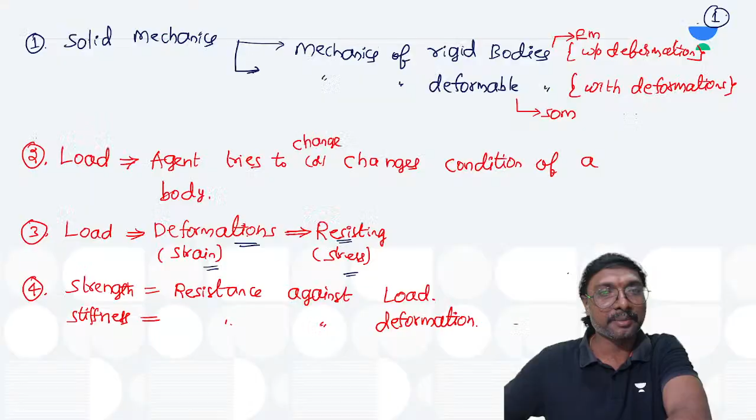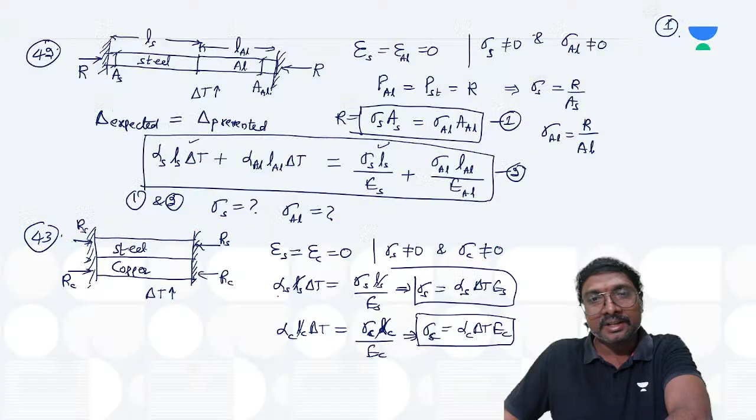So here if you just look at it, 6 lectures we have done. Thermal stresses, stresses on the oblique plane we have done, right? Strain energy also we have done, isn't it? Stresses on the oblique plane we have seen, right? So that sigma theta and tau theta expressions, right? 55 points get over now. So this is your lecture 7 quick revision, principal stresses and strains, right? Now we'll be going for the 56th one.

First of all, what is the principal plane? Tell me. What is the principal plane if you just observe? The principal plane is nothing but a plane with what conditions? Tell me. So on an inclined plane you may be having normal stresses as well as shear stresses, no? So it is a plane with only normal stresses.

Plane with what conditions? Tell me. Only with normal stresses, without any shear stresses, right? Only normal stresses, without any shear stresses. That is your principal plane, right? And the normal stresses on the principal plane are called which one? Tell me. Principal stresses only, no? The normal stresses.

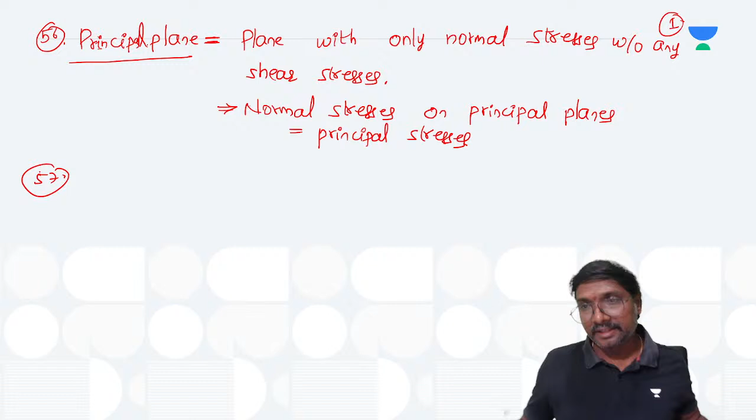The normal stresses present on the principal planes are called as what? The normal stresses on the principal planes are called as which one you can say? Principal stresses. Okay, that is what you are having. Now, if you are writing the expression for these principal stresses, what is the expression for this principal stress you can say?

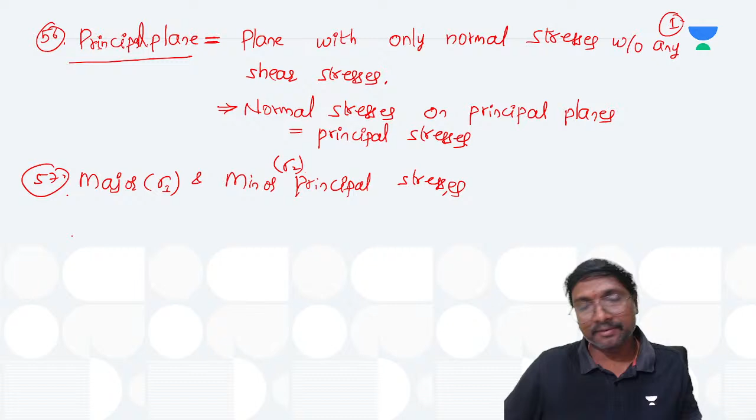That is your sigma 1,2. So how can you get this? Sigma x plus sigma y by 2, plus or minus, under a root. I am not going for the derivation, just the expressions are important for us. Sigma x plus sigma y by 2 plus or minus root of sigma x minus sigma y by 2 whole square plus tau xy square. This is for the plane stress condition.

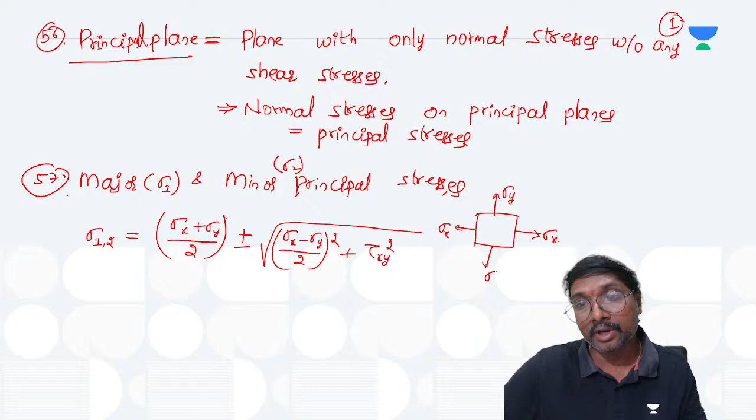So what is the plane stress condition? You will be having the two normal stresses sigma x and sigma y. Along with that, you will have two sets of shear stresses, tau xy and tau yx. Tau xy is equal to tau yx, right? Now whenever you take plus, you will get sigma 1, the major principal stress. If you substitute minus, you will get the minor principal stress sigma 2.

Now, what is the position of the principal planes? Tell me. Position of the principal planes: tan 2 theta, or 2 alpha you can take it, is tau xy divided by sigma x minus sigma y by 2. So alpha 1 you will be getting from here. And what is alpha 2? Alpha 1 plus 90.

If you are getting one alpha, what is alpha 2? Both the principal planes will be perpendicular to each other, you can understand from this expression. Is it clear? No? So shall I go for the next? Everyone noted this or not?

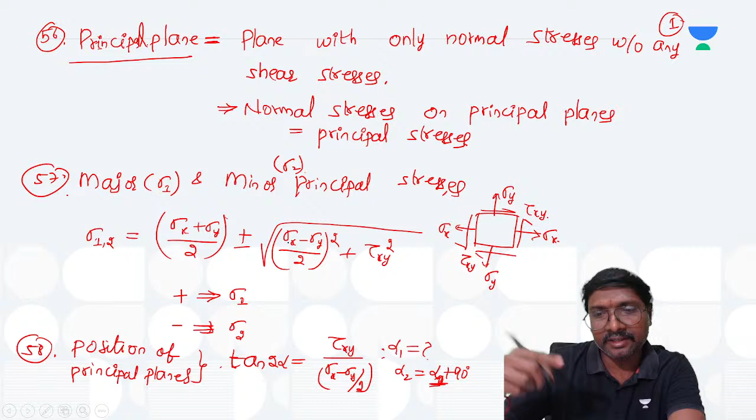Planes of this maximum shear stress, right? If you are just observing tan 2 alpha or 2 theta, you can use anything, right? You can say it exactly in the reverse manner: sigma x minus sigma y by 2, divided by tau xy. So alpha 1 you will be getting one value, and alpha 2 will be which one? Alpha 1 plus 90 degrees.

Okay, from here. Now tell me, on the principal planes, what is the shear stress? I'm writing this here. On the plane of principal stresses, so on the same plane where the principal stresses are present, what is the shear stress? Zero, na? The tau theta.

Now similarly, on the plane of maximum shear stress, tell me, does the normal stress become 0 or is it not 0? Normal stress is not 0, no? So normal stress on that plane may be 0, may not be 0. If you observe, it is nothing but sigma 1 plus sigma 2 by 2, that is sigma n dash. Or you can also write it as sigma x plus sigma y by 2. Both are the same.

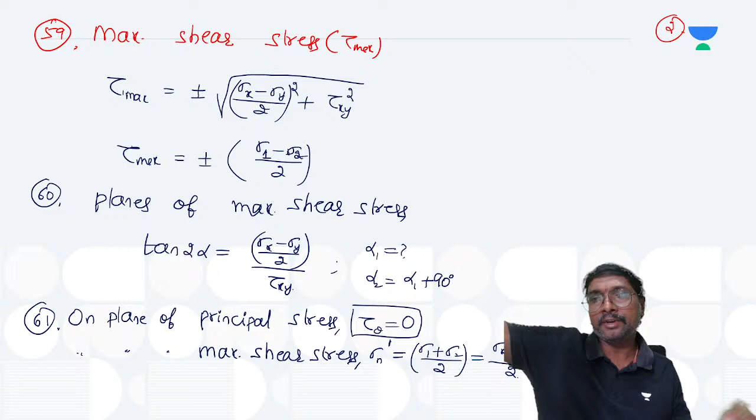Is that clear now? Principal stresses, principal strains, maximum shear stress, location of the principal planes, and location of the maximum shear plane. Is that clear, everyone? Once clear, note down. If not, tell me. We'll move on to the strains part then.

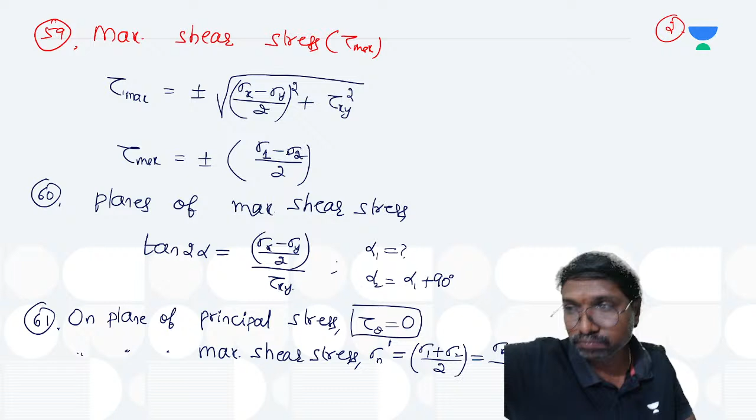Yeah, Satish, good afternoon. Done everyone?

Now here, analogy. What is the meaning of this analogy? The analogy between stresses and strains. Whenever sigma x, the normal stress in the x direction, is there, we have epsilon x, the normal strain in the x direction. Sigma y, normal stress in the y direction, means epsilon y, normal strain in the y direction. Now tau xy, the shear stress corresponding to the xy plane, we have to replace with gamma xy by 2.

Why it is like that I will not explain here, because we just have to remember it. By 2 will come. Or you can also write it as phi xy by 2. Now, sigma theta you are replacing with epsilon theta. Tau theta we are replacing with gamma theta by 2, or phi theta by 2.

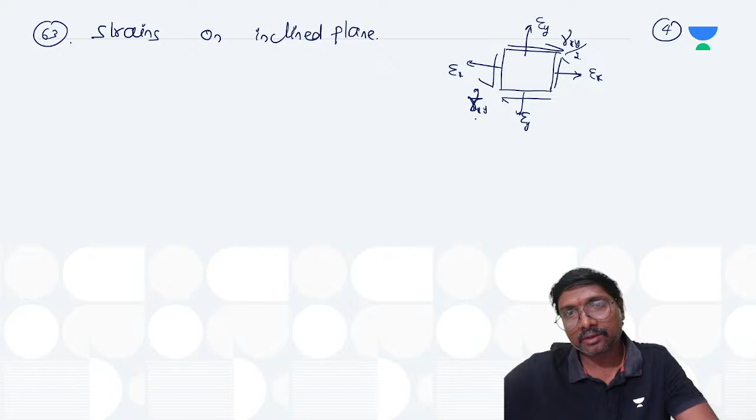Strains on the inclined plane: if you observe, this is your epsilon x, that is your epsilon y, and what are these strains? Gamma xy by 2 will come into picture. This is your gamma xy, but by 2 will come later, in the formula.

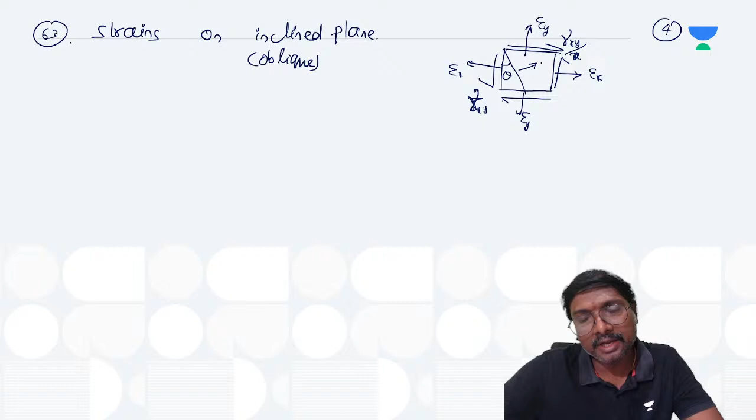Now strains on the inclined or oblique planes. This oblique plane is inclined at an angle theta. This is your epsilon theta, and this is your gamma theta. So normal strain and shear strain you are having. Now tell me, epsilon theta, how can you get that? Sigma x plus sigma y by 2, na?

So we can write it as epsilon x plus epsilon y by 2, plus, in place of sigma x minus sigma y by 2 into cos 2 theta, we write epsilon x minus epsilon y by 2 into cos 2 theta, plus tau xy sin 2 theta. In place of tau xy we write gamma xy by 2, into sin 2 theta.

Okay, there tau theta, right? Here gamma theta by 2. We have to replace the tau theta with gamma theta by 2. So this first term will not be there, but cos 2 theta will become sin 2 theta, sin 2 theta will become cos 2 theta, and this plus sign will become a minus sign.

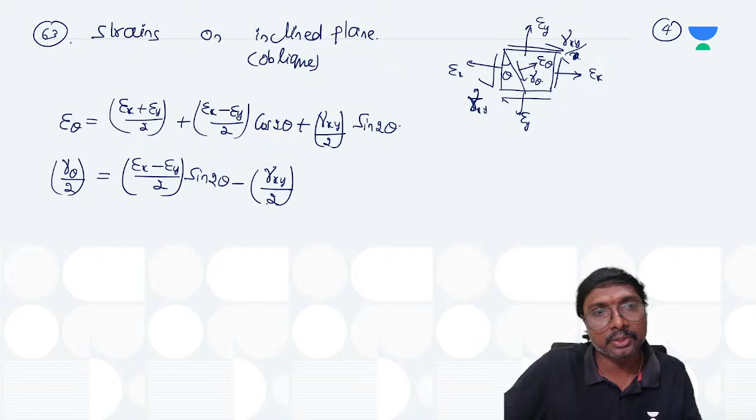Epsilon x minus epsilon y by 2 into that cos 2 theta will become which one? Sin 2 theta. Minus what? Gamma xy by 2 into this cos 2 theta. Is that clear now? That is strains on this oblique plane if you just consider.

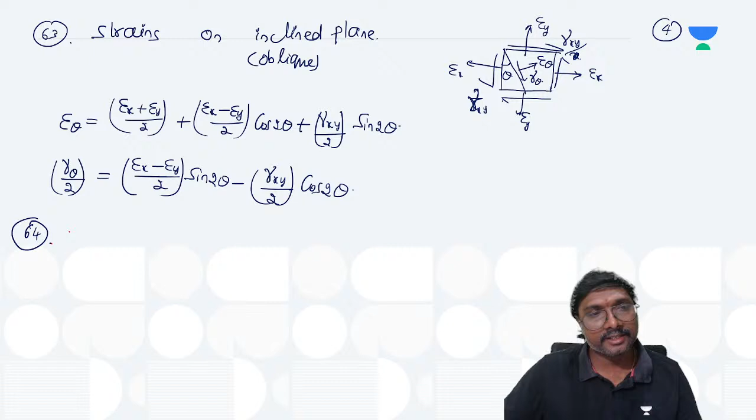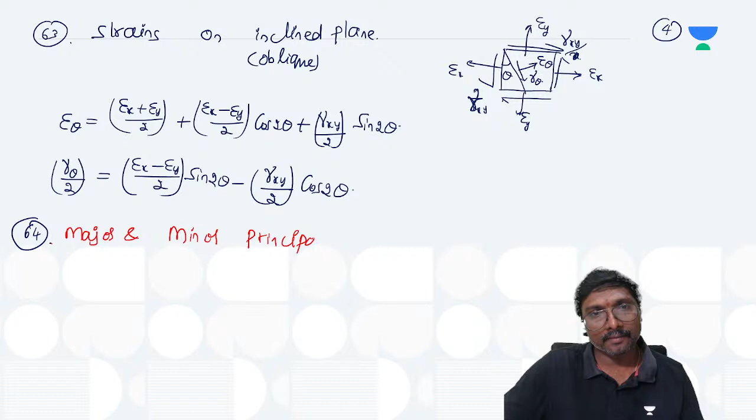Now what can you say if you just observe? Principal strains. Major and minor principal strains, right? What are the major and minor principal strains? Epsilon 1 or epsilon 2 is equal to what?

Sigma x plus sigma y by 2 can be replaced by epsilon x plus epsilon y by 2, plus or minus, what? Sigma x minus sigma y by 2. Here we can write it as epsilon x minus epsilon y by 2 whole square, plus what? Tau xy square.

Now this tau xy square we can write as gamma xy by 2 square. Gamma xy by 2 whole square will come into picture. Whenever you take plus, major principal strain; whenever you take minus, minor principal strain epsilon 2 will come into picture. The last point for today, what is the maximum shear strain?

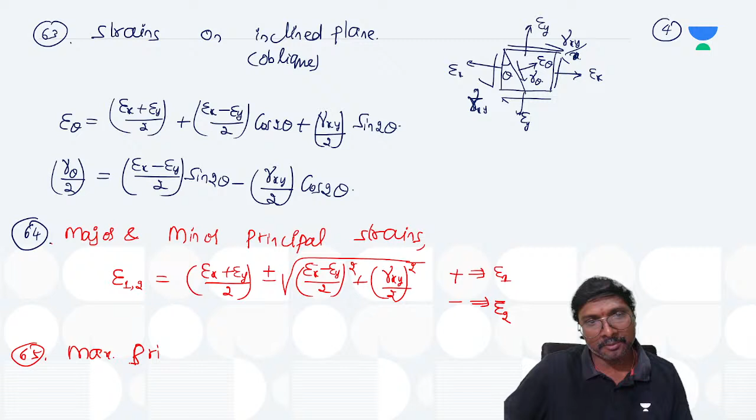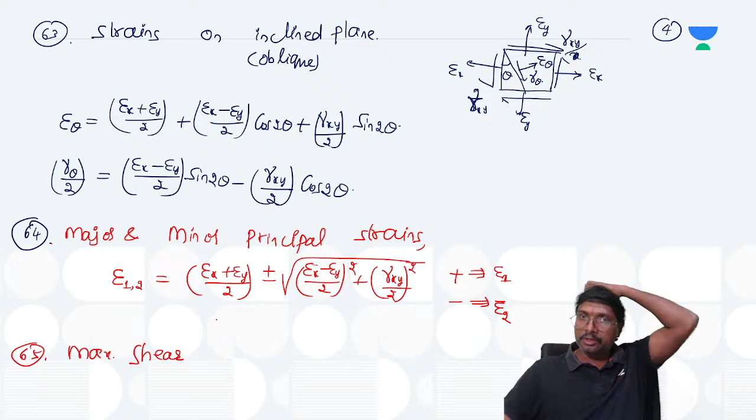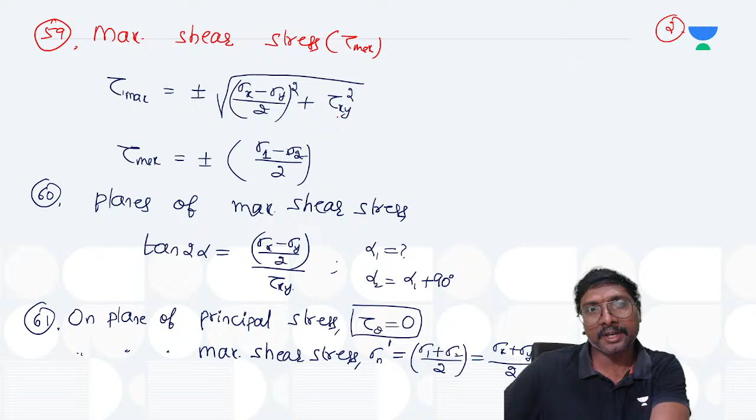One sec. Yeah, under root term. Here what are you having? Sigma x we are replacing with epsilon x. Sigma y you are replacing with epsilon y. Tau xy we are replacing with gamma xy by 2 simply. Yes, this under root term only will come. Maximum shear strain. Yeah, radius of this Mohr circle.

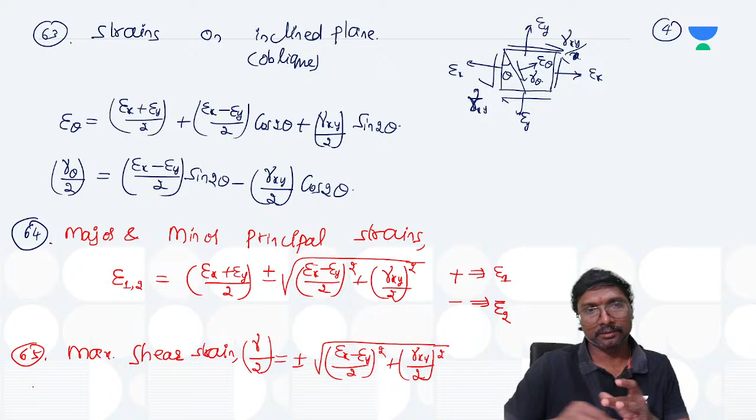That gamma xy by 2 equal to plus or minus, how much? Under root epsilon x minus epsilon y by 2 whole square plus gamma xy by 2 whole square. Sorry, gamma max by 2 we have to write, not gamma xy by 2. This is gamma max by 2, that is your gamma maximum by 2.

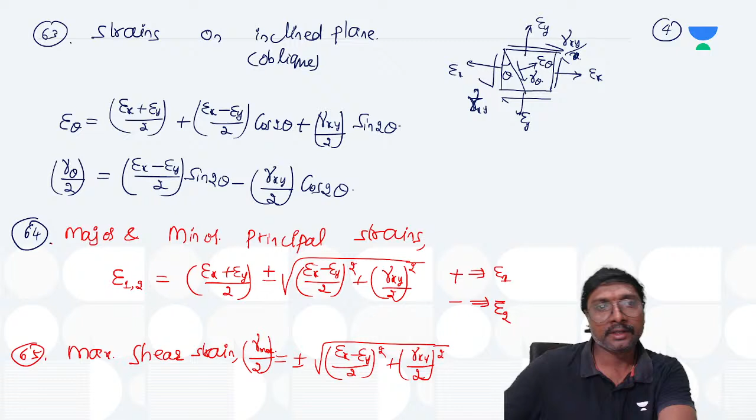So now that gamma maximum by 2, how can you get it? It is epsilon 1 minus epsilon 2 by 2, and this 2 will get cancelled. So like that we'll have it. This is how we get the expressions for principal stresses, principal strains, and all these things.